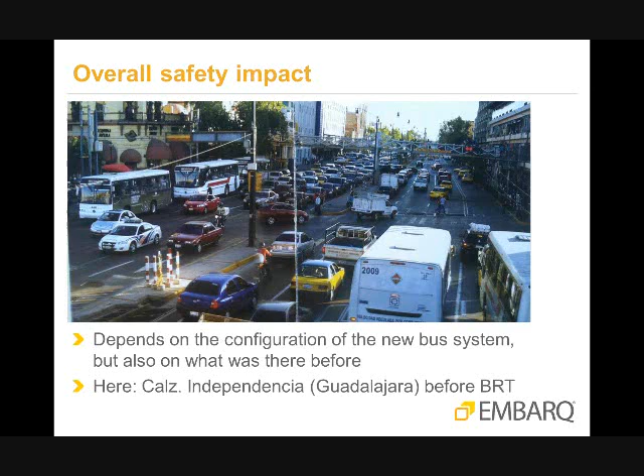And you have here an image that shows what the street looked like before the BRT was implemented. It was one of the major arterial streets in the city with quite a lot of traffic. Already some priority features for buses. It seems like there is a bus priority lane on the curbside, but with not very good enforcement and a lot of traffic and some fairly chaotic turning movements.

Now you see a picture of what the new bus system looks like. This is the Macrobus BRT that was implemented in 2009 in Guadalajara. And just looking at the changes that happen on the street level, you would probably expect to see a positive safety impact. So I'll just point out a few things. There was a reduction in the number of lanes, of course, to accommodate the BRT infrastructure in the center. Pedestrian crossings are shorter because there's a new median that has to accommodate the stations.

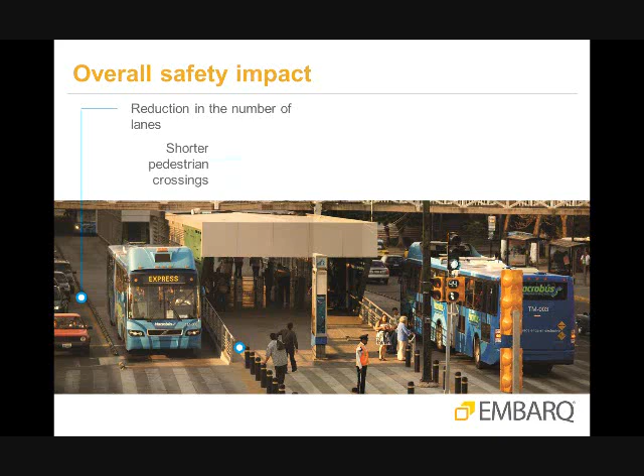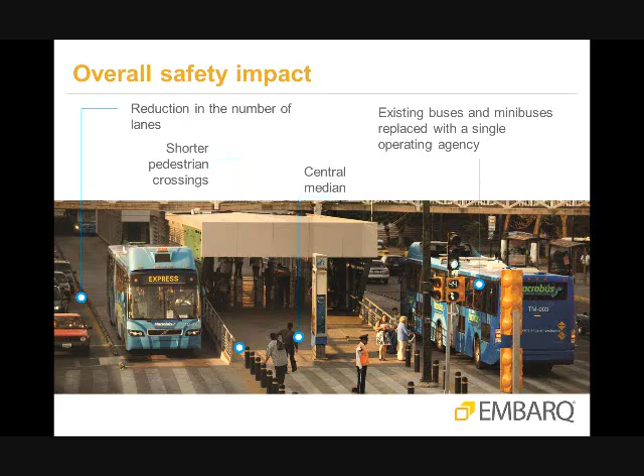And of course, the existing buses and minibuses on the corridor were replaced with a single operating agency. So again, this is an opportunity, first of all, to eliminate competition for passengers among the different bus operators, but also to have centralized operations control and driver training and so on. So yes, we would expect to see a positive safety impact just from the changes that we can observe on the ground. And when we look at the actual data, we see that indeed there was a positive safety impact.

What you see here is a graph of crash data that we received from the Transport Secretary for the state of Jalisco, where Guadalajara is located. And you see the black line on the graph, which shows citywide crashes that remain more or less constant before and after the implementation of this BRT. But the vertical bars, which show crashes on the corridor, you can see that they are going down after BRT implementation, and they remain at a fairly low level during the first 2 years of operation.

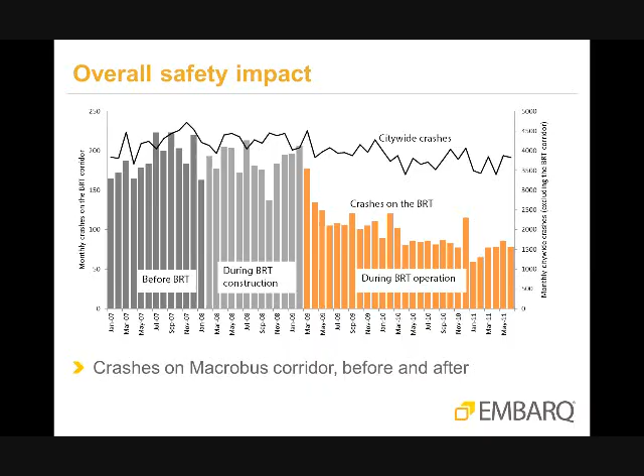So there was a clear positive safety impact there, and it was sustained for the first 2 years that the system was operating. And this is consistent with the types of impacts that we've been able to see in other similar BRTs in Latin America and around the world. And this table shows very detailed safety impacts from BRTs in Mexico City, in Guadalajara, and in Bogota, also from Ahmedabad, and one example from Melbourne in Australia.

You see that the systems in general are fairly similar in their configuration, but they tend to replace different things. So Bogota, for instance, at least in Avenida Caracas, was replacing an existing busway. Nevertheless, the impacts are generally relatively similar. There is a clear decrease in fatalities and injuries on all of these corridors, and generally also reduction in property damage crashes, with the exception of Metrobus Line 3 in Mexico City, where there was a slight increase in property damage crashes.

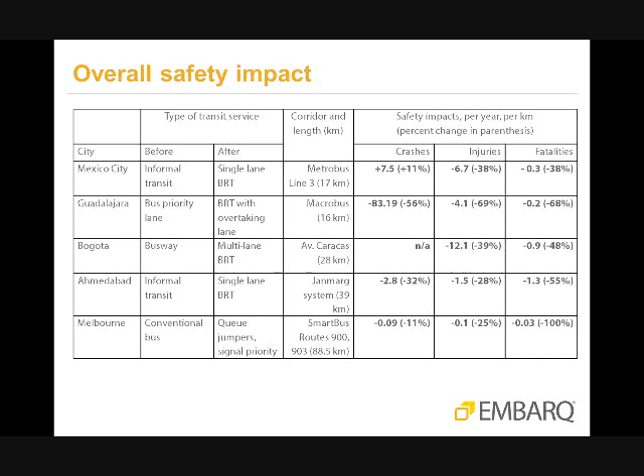So when we look at the overall impact, when we do an estimated weighted mean effect from implementing the BRT based on the data that we've seen so far, we see that the results are indeed fairly consistent, and we see about a 52% reduction in fatalities, about a 39% reduction in injuries, and a 33% reduction in all crashes. And these are all statistically significant at the 95% confidence interval. And we see this for Latin America. We see this more broadly for the developing world when we average the results from Latin America and from India.

So it seems to be a pretty clear indication that the implementation of BRTs in these places where we have been able to collect before and after data has had a positive impact on safety. So this would indicate that it would be important to start factoring this into the decision-making process, and when doing cost-benefit analysis to account for these impacts as well.

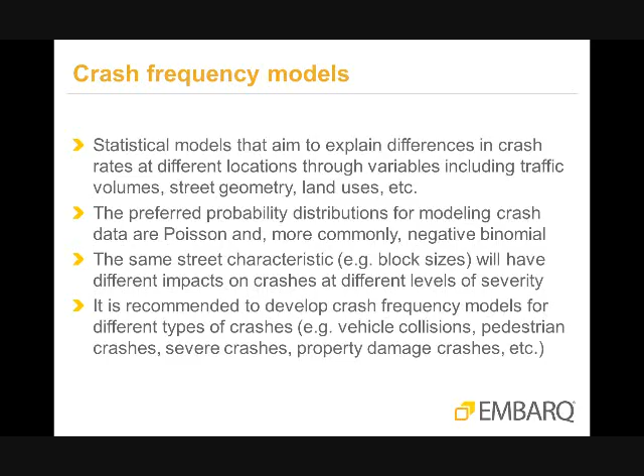They typically use a Poisson or a negative binomial distribution. And one thing that is interesting about crash frequency models is that the same geometric characteristics, for example block sizes, will tend to have different impacts on crashes, different levels of severity. So what was important for us is to develop different models for different types of crashes. So we have pedestrian models and vehicle collision models, and we have fatal crash models and property damage crash models.

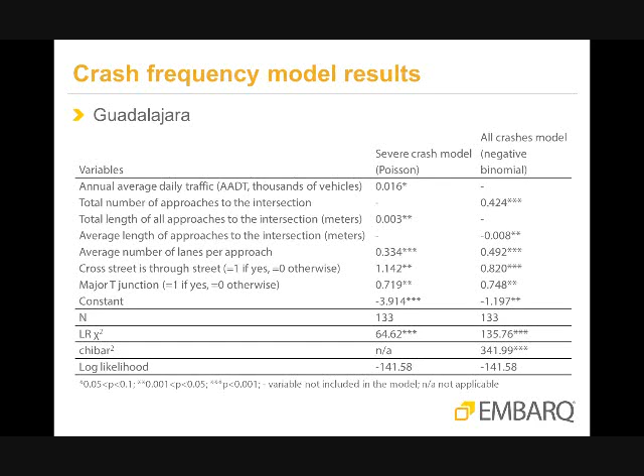But what I wanted to show here is one of the most common problems that we've encountered, which is that always a key variable in any crash frequency model is traffic volume, because it is one of the key predictors of accident rates, but it's also a kind of data that's very difficult to get in some places, and we weren't always able to gain access to this type of data. Sometimes we were able to include it, as in this model, sometimes we were not, and it's a clear limitation in our data analysis, and something that I wanted to mention right at the beginning.

Another example of how to develop different crash models for different crash types is the one that we've done in Mexico City, where we have one model for pedestrian crashes and one for vehicle collisions. Another thing that's interesting in this model, and I've circled it here in red, is that we've introduced some variables for different types of bus systems to see their impact on safety.

One thing that is interesting in this table is, first of all, the finding on counterflow bus lanes, which are a fairly popular solution, especially in places like Mexico City, but we found in our analysis that they are a significant predictor of higher crash rates, so a definite safety risk. So based on this, we would not recommend counterflow bus lanes.

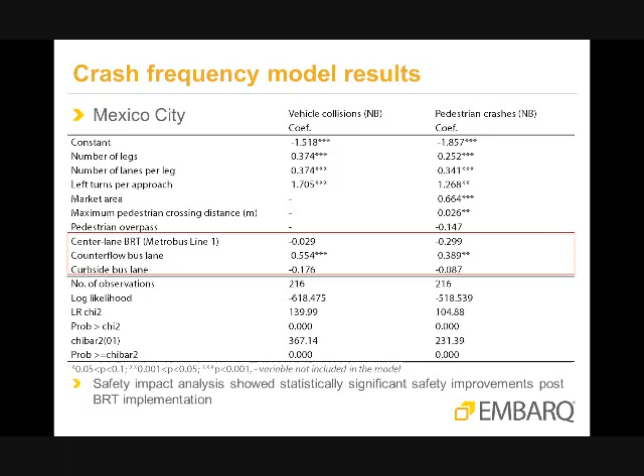The other finding that is interesting here is that the variable for the center lane BRT did not have a statistically significant impact on crashes. This is interesting because in the previous slides I'd shown that when we did our safety impact analysis, we found that there were positive impacts from implementing these different BRTs, and that these were statistically significant. So it's interesting to ask why in the crash frequency model the BRT variable will not be significant.

And the answer that we would put forward to that question is that it's not the implementation of a specific bus system in itself that will have an impact on safety, but it is the way it is designed. And in the case of this BRT, it's the changes that need to be made to the street infrastructure to accommodate the BRT. So I'll illustrate this.

This is Metrobus Line 1 on Insurgentes in Mexico City. It's the same example from the crash frequency model. And you can look at some of the changes that were made to the street, which also, according to the crash frequency model, contributed to the better safety record. One is that you have to remove mixed traffic lanes to accommodate the buses and the station infrastructure, and removal of lanes was significantly correlated with fewer crashes.

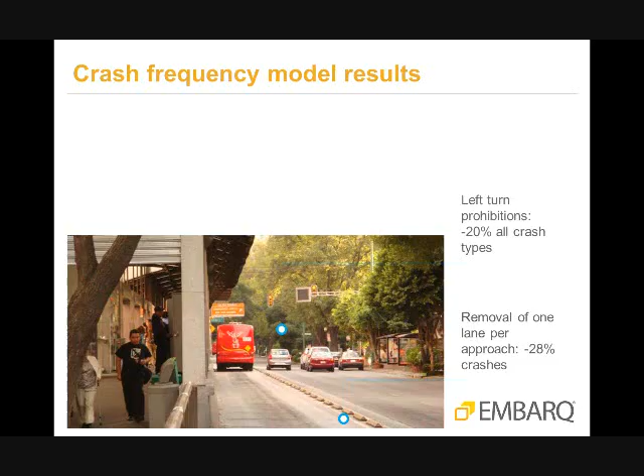There are left turn prohibitions on most intersections on these BRT corridors. This is mostly to give more green signal time for the BRT, but it's also a positive safety countermeasure because left turns are a major risk factor. And then, of course, the presence of the central median itself is correlated with fewer vehicle collisions.

And because there's a central median, crosswalks are much shorter because pedestrians no longer need to cross the entire street. And in this case, when we look at the model, shortening the crosswalk by 10 meters results in approximately 26% reduction in pedestrian crashes. So the takeaway for us from these crash frequency models is that the way the BRT corridor or busway corridor is designed has a huge impact on its safety performance, and we believe that this is what explains the difference in safety impacts that we've seen in the literature.

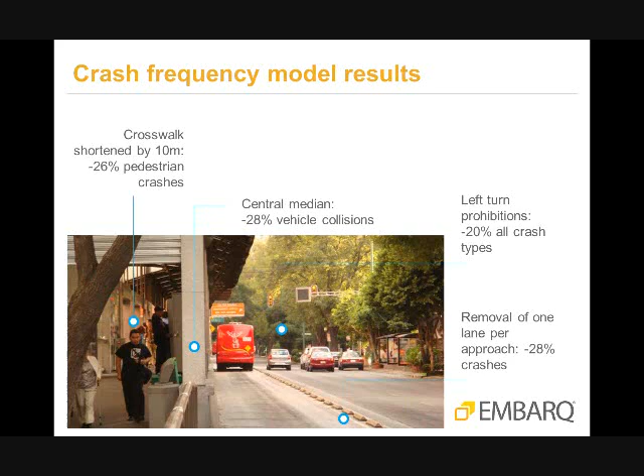Now, I'll go into more detail on some of our findings and pull out some examples from the data analysis. One thing that was interesting for us to look at is to compile information on all the fatalities that we had in our database to see which types of road users were more frequently involved in fatal crashes. This is the result. About 54% of them are pedestrians.

This is fairly common on any urban road. It's not specific to any type of bus corridor. But what was interesting for us to note here is that there were no fatalities recorded for BRT passengers in the database. We know of fatalities to BRT passengers from evidence in other cities, but they would be less than 0.1% if put into this pie chart.

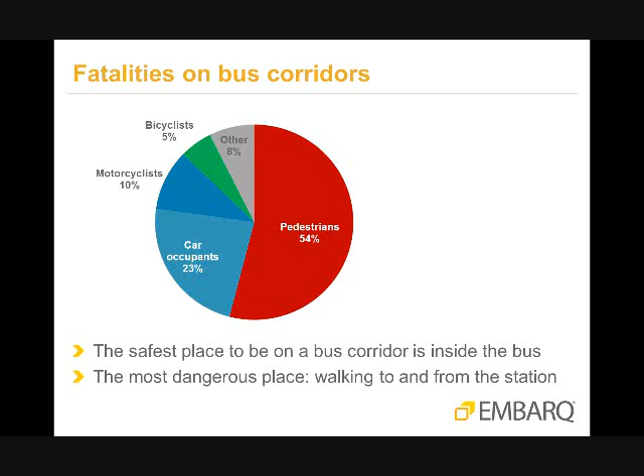So the takeaway here is that the safest place to be on a bus corridor is inside the bus, but the most dangerous place to be is when you walk to and from the station. So really this helped highlight the issue for us that safety on a bus corridor is primarily an issue of pedestrian safety. And the most common type of crash that we have observed on these bus corridors, the most common type of pedestrian crash, is when pedestrians run across the street in mid-block and get run over by vehicles.

For any BRT agency, this is likely to be the most frequent type of collision involving BRT vehicles. And because pedestrians are vulnerable road users, it's most likely to be severe or fatal as well. One of the major risk factors here is block sizes, and that is correlated with traffic speeds.

And what we found in our analysis, and this goes back to the idea of developing crash frequency models with different levels of crash severity, is that for every additional 10 meters between signalized intersections, there is a 2% decrease in all crashes because there are fewer conflicts with fewer intersections. But there is a 3% increase in severe crashes because speeds increase and because there's a higher incentive for pedestrians to jaywalk when the crosswalks are so far away.

Now, large block sizes are a very common feature of Indian and Chinese cities, where you often have as much as 1 or 2 kilometers between signalized intersections. And if you're a pedestrian wanting to cross the street, if you want to follow the rules and walk to the nearest signalized crossing, simply crossing the street can take 1 or 2 kilometers. So very few people will actually do that.

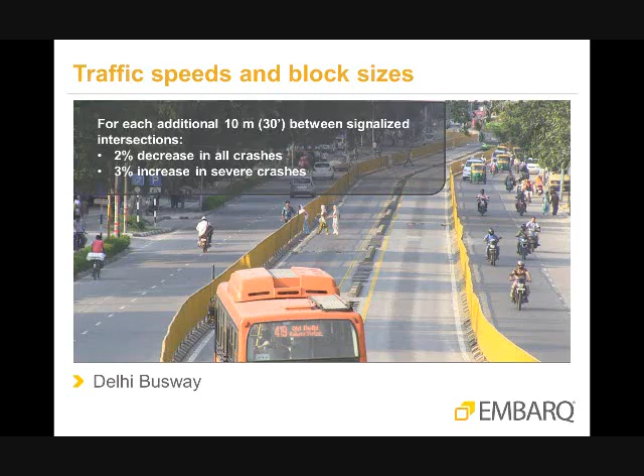And as you can see in this image from the busway in Delhi, and from many similar images that we've seen from other systems, what you end up with when you have large block sizes is a lot of pedestrians crossing in the block. It's not only a feature of cities in China or India. We've seen it in other places as well. Even in Latin America, where you usually have a much denser street network, what we see is that, especially as you move away from the city center, block sizes start to increase. And you have an example here from the southern part of Avenida Caracas in Bogota.

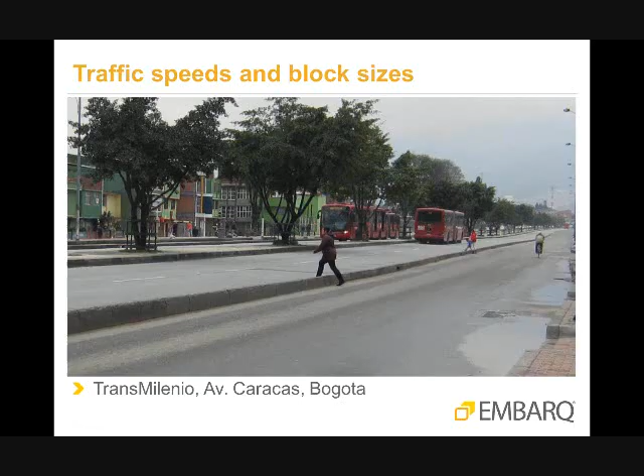And the typical scenario here is when the city expands and the street used to be a highway connecting 2 cities, and now with urban expansion it becomes a city street, but it's not usually retrofitted to reflect the new land uses around it. So you'll have situations like the one in the image where you see the street just stretching out into the horizon, and the nearest crosswalk is here. You can barely see there's a red signal, but very few people will actually walk that far to try to cross the street.

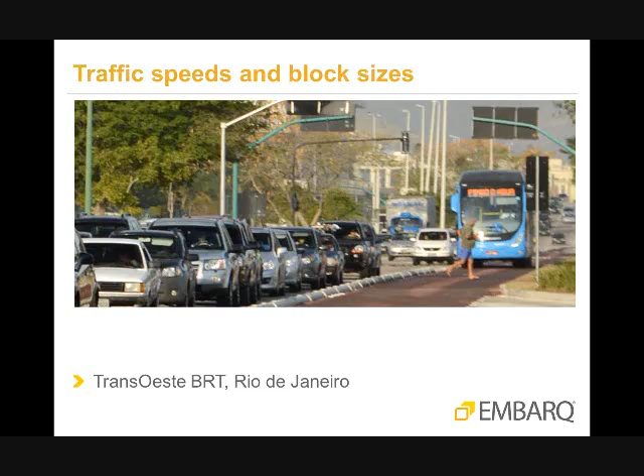And as you see in the picture, the danger here is that the BRT is arriving at a much faster speed. In this particular instance, the pedestrian was fine, but this is one of the most common types of fatal crashes that they've had on Transoeste. So it highlights how important this issue of pedestrian crossing in mid-block is.

Now, the issue of speed is a bit tricky because it's not enough to simply post a lower speed limit. You have here two examples. The one on the left is the same street as in the previous example. It's the Transoeste corridor in Rio. And the one on the right is the southern end of Avenida Caracas, where the Transmilenio buses operate in mixed traffic.

And you see that one street has a 70 km/h speed limit, which is much too high for an urban area with crosswalks. And the street on the right has a speed limit that is much lower. It's 30 km/h, but in reality, traffic goes at the same speed on both roads because the road is straight and the design speed is much higher than 30 km/h.

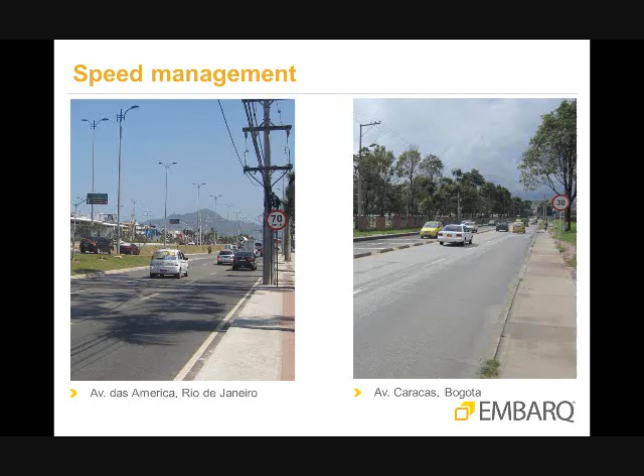So the point I want to make with these two images is that speed limit signs by themselves are not effective, and that streets have to be designed for their desired speed.

Now, one issue that's related with this is how do we get pedestrians across the street in mid-block, because I mentioned that this is one of the key safety issues. And I wanted to address the issue of pedestrian bridges because they tend to be a somewhat popular solution, especially on these sections with longer blocks.

And the problem with pedestrian bridges, as illustrated by this image from Metrobus Line 2 in Mexico City, is that pedestrians don't like to use them. And even if the bridge is right there, as in this image, pedestrians will cross under it. So that's why we don't consider it to be a safe solution, especially on urban arterials, which are relatively narrow, and when there's a high incentive for people to just run across the street.

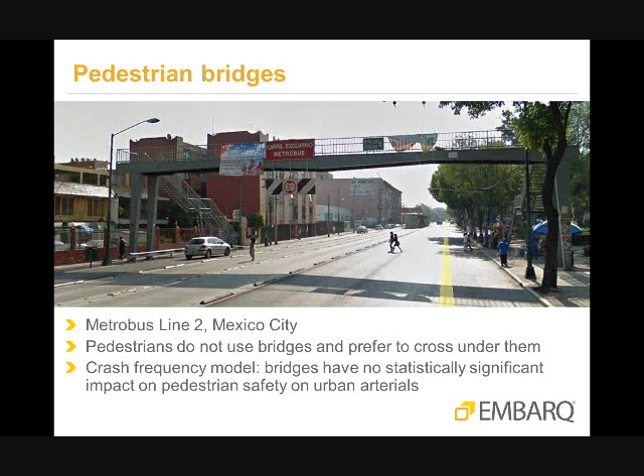We've also included pedestrian bridges as a variable in our crash frequency models, and we've seen that on urban arterials, they have no statistically significant impact on pedestrian safety. So from this point of view, it's not a useful piece of infrastructure, mainly because it's not being used by pedestrians to cross the street.

Now, pedestrian bridges are very effective on freeways, and we have here an example from the Metrobus corridor in Istanbul. And when you have a street that has this many lanes and much higher speeds, then people will use the bridge. And when we introduced it as a variable in the crash frequency model, bridges on expressways were strongly correlated with lower pedestrian crash frequencies.

This isn't to say that it completely eliminates the problem, because when we looked at the crash data for this Metrobus BRT in Istanbul, we found that the most frequent type of fatal crash would still involve pedestrians running across the street. You may not think that pedestrians would run across a street as wide as this one, and we were a bit surprised to see it as well, but it does happen, and it was a common cause of crashes.

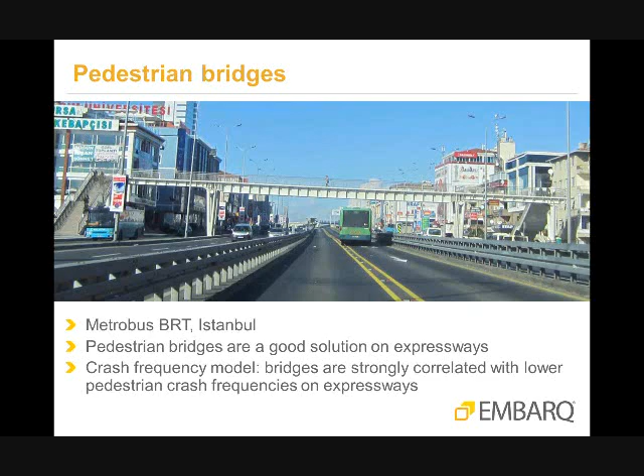So then the question is, what should we do on urban arterials to allow pedestrians to cross in mid-block? And we would argue that the best solution is to simply have a signalized mid-block crossing. And you have an example here from a street in Mexico City. And the point of this example is also to illustrate one of the common problems with mid-block crossings, which is that often drivers will not respect the red light if the only conflict is with pedestrians.

And this will vary a lot from city to city, but especially in this case, in Mexico City, and that's why I'm using this example, it was very difficult for pedestrians to cross here because even when the light would turn red for vehicles, the traffic would not stop, they would keep on going. So essentially, there was no difference for a pedestrian crossing in mid-block or crossing at the signalized crosswalk.

We did a road safety audit on this road because they were planning to introduce a new Metrobus line that would use this bus lane. And one of the recommendations here was that they should add traffic calming measures along with the mid-block crossing to slow down traffic. The recommendation was implemented, and you see an image on the right. There's a speed hump next to the crossing. It's probably not the best design for a speed hump, but I don't want to go into that much detail.

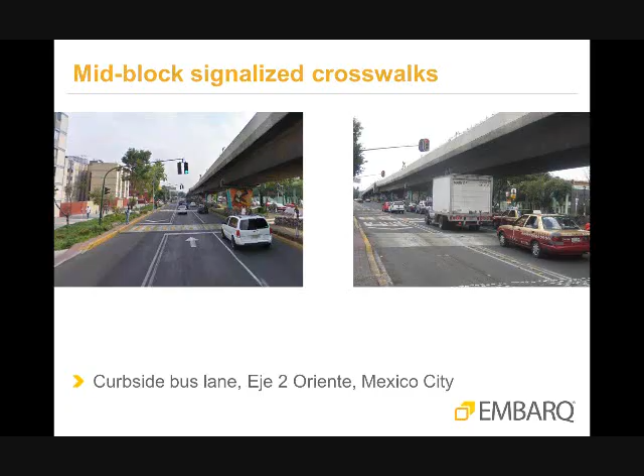And then the advantage of the speed hump is that it's a general traffic calming device, so it lowers overall speeds on the corridor, which also improves safety. Now, I want to move on to the third question that I want to address in this presentation, which is how do safety countermeasures impact operational performance?

And this is directly responding to concerns that we've received from BRT agency staff, because most of the recommendations that we propose for improving safety, and these are the ones that I've shown in the previous slides, have to do with reducing speed, either by specifically adding traffic calming measures or by adding more traffic signals to shorten block lengths.

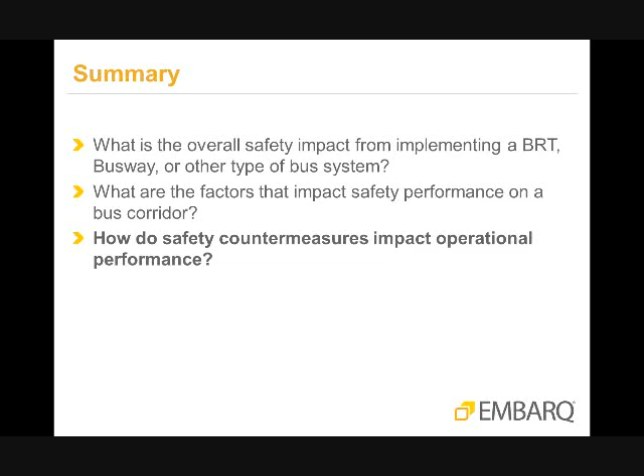So the concern there was, the way one BRT agency staff member put it is, do we need to take the R out of BRT to make it safe? Will this reduce speeds to a level where you completely lose the travel time savings and all the other benefits of BRT? And we were able to address this specifically for the Transoeste BRT in Rio de Janeiro, where we were invited to carry out a road safety inspection on the corridor after it opened.

And we started by looking at what the safety issues were. We proposed safety countermeasures, and then we were able to build a micro-simulation model to test the impact of these countermeasures on the operational performance of the BRT.

Now, to give you a bit of background on the Transoeste BRT and on the safety issues that we found, it's a system that has pretty much the same safety problems as we found on many other BRTs in Latin America. They just tend to be magnified here because it is a very wide street. It is as wide as 90 meters in some places, which is probably the widest BRT corridor we've ever had to work with. And it's very, very difficult for pedestrians to get across.

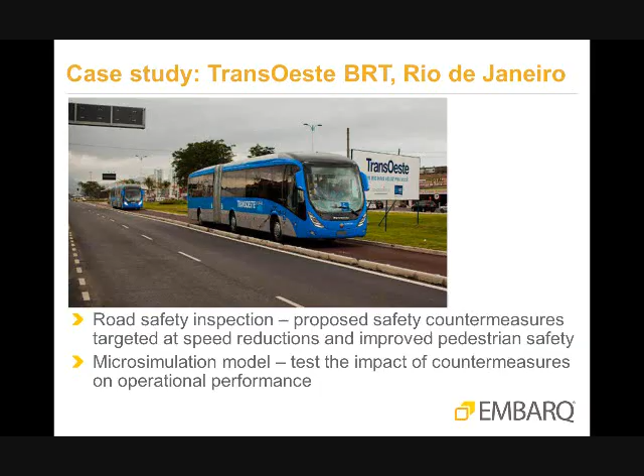The speeds are very high. They are 80 kilometers an hour in the center lanes and 70 kilometers an hour in the side lanes. So that is a big safety concern. And there are very few opportunities to cross for pedestrians. So, of course, a lot of jaywalking and a lot of fatal crashes happen on the corridor because people are just running across the street where the traffic speeds are so high.

I'll focus here on three safety recommendations that we selected because they would have potentially an impact on BRT operating speed. One was to reduce the speed of the BRT from 70 kilometers an hour, where it currently is, to 60 kilometers an hour, and to further reduce it to 30 kilometers an hour at stations. And this is because we had observed that the majority of pedestrian crashes tend to happen in the vicinity of stations. Not necessarily because stations are more dangerous, simply because more pedestrians try to cross them.

And also because there are potentially some conflicts between buses as well, especially on a system like Transoeste, where you have local buses that stop at every station and express buses that will bypass some stations, and then there's some potential conflicts when the local buses merge back into the express lanes.

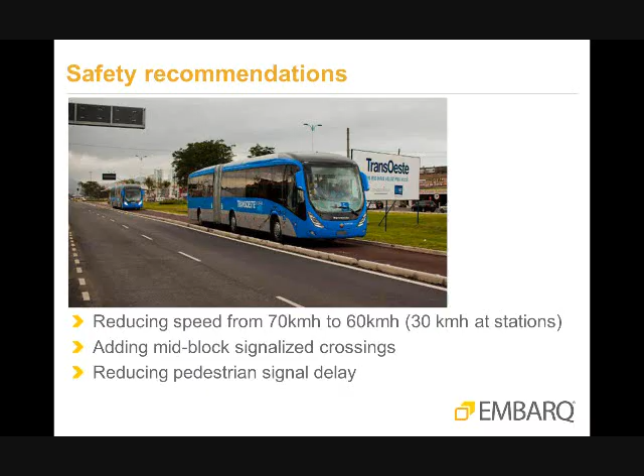Another recommendation we had was to add more mid-block signalized crossings. Right now we measured that on this corridor, the average length between signalized crossings was about 600 meters, which is about 6 times more than you would see in a typical urban center. So it's a quite long distance and not one that you'd expect pedestrians to walk in order to cross the street. And we also had recommendations for reducing pedestrian signal delay. And I'll explain through this example why that was important for Transoeste.

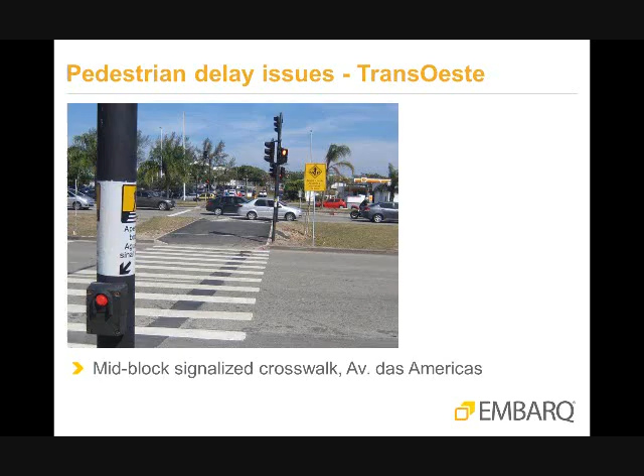They do have mid-block signalized crossings. They've especially added them in places where crashes had happened with pedestrians in the past, and they were trying to address this issue. So in itself, this is a good safety initiative, but the problem in this case is the configuration of the traffic signal. Here's a button-activated signal, as you can see in the image, and I have a diagram here that illustrates what happens when a pedestrian arrives and tries to cross the street.

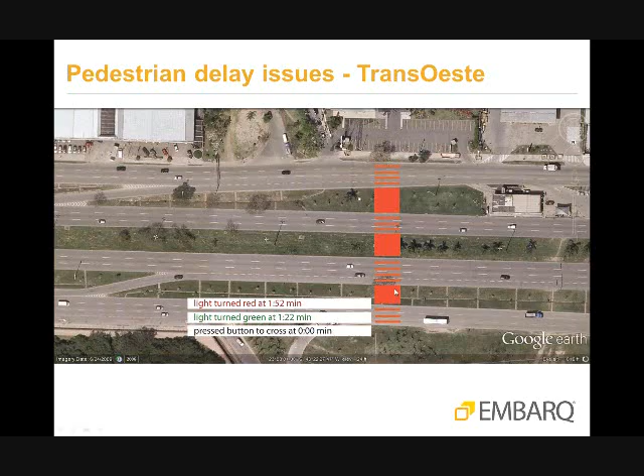We timed it. We went and we pressed the button on one side, and then it took 1 minute and 22 seconds before it turned green. And the green phase was so short that we could only cross the first 3 lanes, and then we had to stop again. And then we pushed the second button to cross the second part of the street. And you can see where this is going. All of these start to add up. And when we crossed the entire street, we counted. It took us 8 minutes and 4 seconds to get to the other end.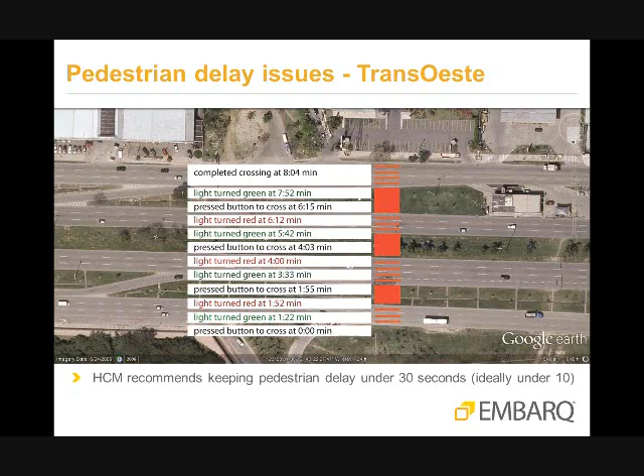And of course, nobody's going to wait 8 minutes and 4 seconds to cross. So what ends up happening is people cross on red. And just to put this in context, the Highway Capacity Manual recommends keeping pedestrian delay under 30 seconds and ideally under 10 seconds. And here we have 8 minutes and 4 seconds. So this helps show you the magnitude of the problem.

Now, I don't have time to go into the detail of the specific recommendations that we had for signal timing and for where to add crosswalks. I can provide more references at the end, or we can address this through the questions. But I just wanted to quickly give an overview of the results that we had from the simulation, because we've used the EMBARQ BRT simulator, which is a micro-simulation tool specifically designed for BRT operations that was developed by EMBARQ Brazil.

And what we did is we first built a baseline model that replicates the way the corridor looks today. And we looked at several indicators, one being operating speed for different types of services. As I mentioned, we have express buses and local buses. We looked at travel time, and we looked at speed variance and speed variability. And we started with the baseline model, and then we started introducing changes that directly reflected the safety countermeasures that we were proposing. So the first one was to slow the BRT down to 60 kilometers an hour. The second one was to add a 30 kilometer an hour limit at stations.

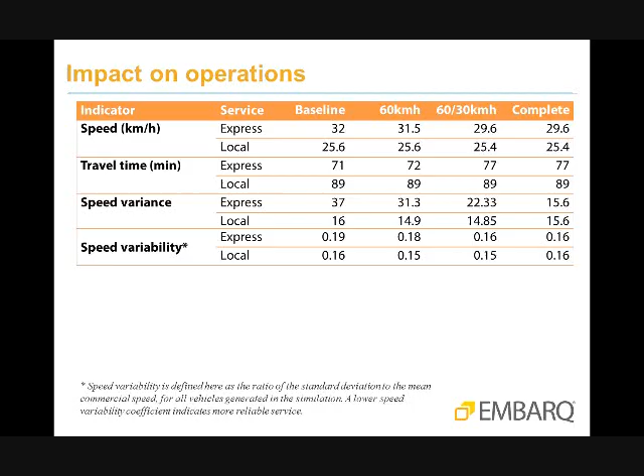And finally, the last scenario, which I call here complete, is the one where we also added more mid-block signalized crossings, and we adjusted signal timing so that pedestrians have lower delay. Now, there are a lot of numbers, and I know it's difficult to interpret tables in a PowerPoint, but the key takeaway for us is that there was, of course, a slight negative impact on the operating speed for the BRT. Right? The express service goes from 32 kilometers an hour in the baseline scenario to 29.6. But it's still above the 25 kilometer an hour benchmark, which I found in the literature is generally considered to be the threshold for high-quality BRT operations.

This, of course, directly translates to a slight increase in travel times. It's an additional 6 minutes terminal to terminal. And interestingly enough, there's a lower speed variability. So in a sense, because the speeds have been lowered, overall the bus frequency is better maintained. But my main point here is that these impacts are relatively minor, especially compared with the potential for significant safety improvements. Now, we don't have enough data to provide an estimate of the impact on crashes from implementing these different measures. But from what we've been able to see in the literature from similar interventions, we could have a reduction of up to 60% in severe crashes, especially at the main black spots.

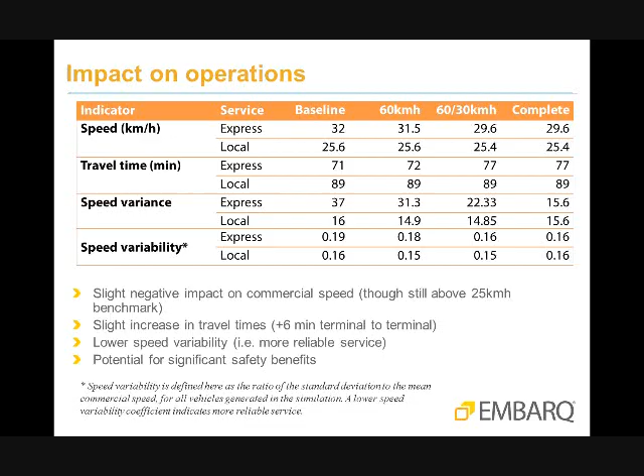So what we're hoping to do with this is to give the BRT agency, in this case, the opportunity to make a very informed decision and know that they're able to drastically reduce crashes, and especially severe crashes on the corridor, with only a slight negative impact on operations. Now, I wanted to also show this graph, which is interesting for illustrating this relationship between safety and operating speed. And this is from a report on the Metrobus BRT, Metrobus Line 1 in Mexico City.

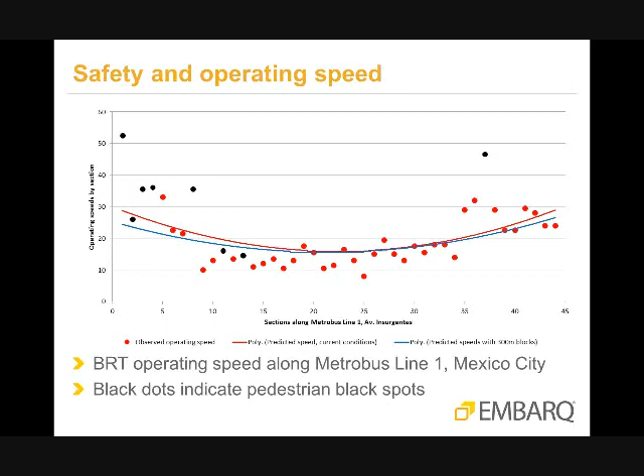And as I mentioned at the beginning, this was only a brief overview of the different aspects of our work, both research and projects, on the topic of safety on bus corridors. And for those of you who are interested, I know we can circulate the PowerPoint, and I wanted to point out two additional resources. One is our Safe Design Guidelines for BRT, which is published on our website, and I'm providing the link here, which really goes into detail to show all of the common crash types and the types of countermeasures that we've seen applied in different systems, and just some best practices recommendations for designing BRT corridors.

And then there's a paper that we published in the Transportation Research Record that includes all of the crash frequency models that I've shown in this PowerPoint, and has a more detailed discussion on the methodology and the assumptions and the data collection and so on. So if you're interested in learning more on any of these topics, we will circulate the PowerPoint so you can take a look.